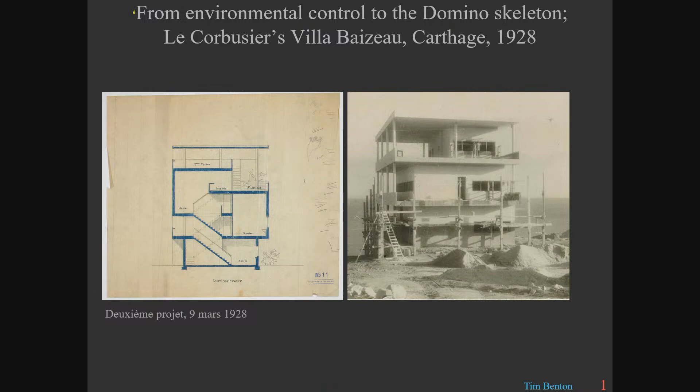Tropical climates or hot climates in ventilation and protection against the sun. So there are 2 sets of completely different ideas in this project, which are incorporated in 2 projects, as we'll see.

Is this working? Is this working? Come closer this one. Closer? Yeah. Ah, okay. I have a feeble voice. Is that better? Okay. Fine. Well, I'm not going to repeat what I've just said.

So I'm interested in it from these 2 points of view, and I'm going to try to interest you in it as well. So this is Sidi Bou Said in a suburb of Tunis, in Carthage, which is a kind of promontory that sticks out beyond the city of Tunis into the sea. It's a beautiful residential area which was developed in the late 19th century. Has wealthy villas in it, very beautiful. It's now a kind of tourist center.

And from there, you can look back to the area of Sainte-Monique, which is a suburb, and there is the Villa Baizeau. And on the left of it is something that didn't exist when the building was designed, which is the presidential palace, which was built on land recovered from the sea. So at the time, the house was on a little cliff that went down to the sea with a beautiful view from the sea.

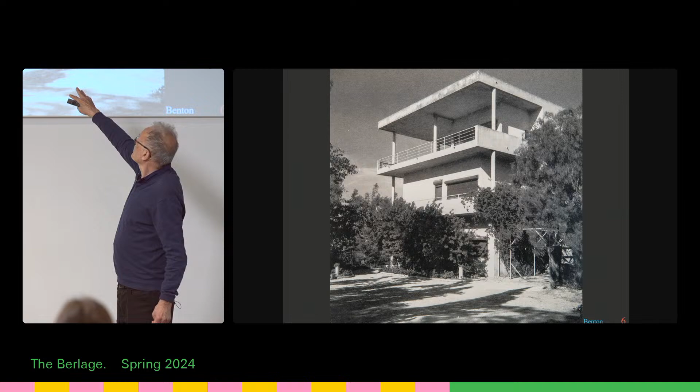This is the back of the house. I'll show you the orientation, but this is the northwest side of the house. And you can't see it, but there's a garage here, an external garage, which was originally built into the house, but was then extruded in a fairly late stage of the design, as we will see. And this is the view looking back towards Sidi Bou Said. So this is the reverse angle from the picture that I showed you from Sidi Bou Said looking this way. So it's a beautiful site, and wonderful Tunisian climate, of course, and this is the context for the project.

This is the exhibition and conference and events that went with this catalogue. And it's interesting because Roberto Gargiani, who is the commissaire of the exhibition and the catalogue, though he didn't actually organize it, it was Chacha, what was her name? I'm sorry, I can't remember her name. But she was the architect who physically organized the exhibition. But their slogan for the house is that it's a simple house.

In the Tunisian context now, there's a movement to try to revive interest in the values of modern architecture and to strip it away from the colonial aura, if you like. And so there's a big campaign behind all this to try to get the house opened up, to get the Secret Service out, to make it visitable, to make it a tourist attraction. There's a whole politics behind that. And so this presentation of the house as simple, undecorated architecture is part of the rhetoric of the exhibition.

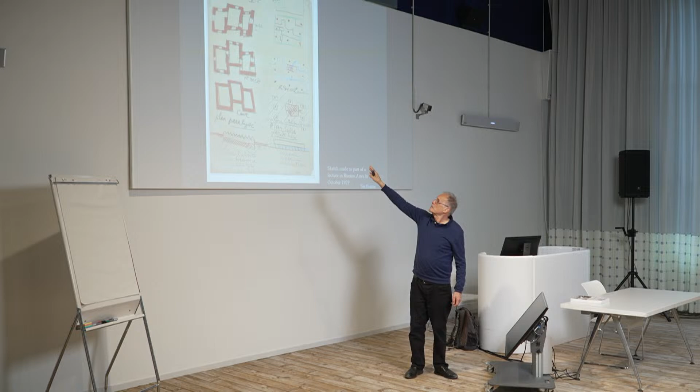So this is an exhibition, in a conference, a lecture in 1929 in Buenos Aires. This is the drawing that he did. He used to do these drawings himself while he was talking. And this explains his principles. There's the paralysed plan of walls made of solid material. Every floor dictates the floor above, and so forth.

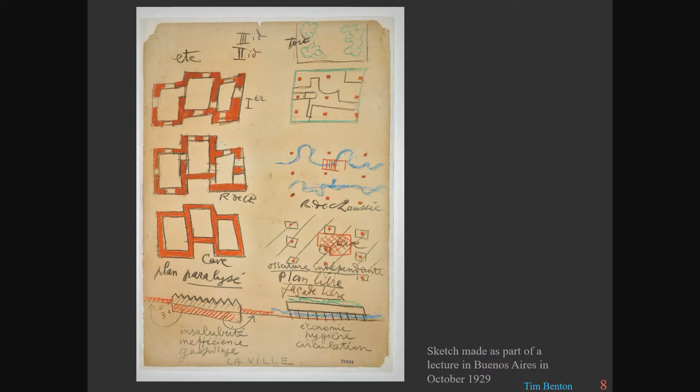And this is the revolution of modern architecture, where the little pilotis, the little red points, are completely separate from the organization of the spaces. This is the separation of structure from enclosure. Okay. And this is one of the fundamental ideas of modernism, that is the movement in architecture between 1920 and 1929. Okay.

So you find it in the Maison Cook, 1926. There's your pilotis. The pilotis are set back from the wall, so the windows are a curtain wall. The windows are supported from the floor slabs, and the column, you can see, goes all the way up through the building. There's the Villa Stein de Monzie, where it's not so easy to see, but this is also a curtain wall. The pilotis are set back, and the windows are strip windows, which are supported from the slabs.

And the end of this sequence, oh, what's that? Water. Oh, thank you.

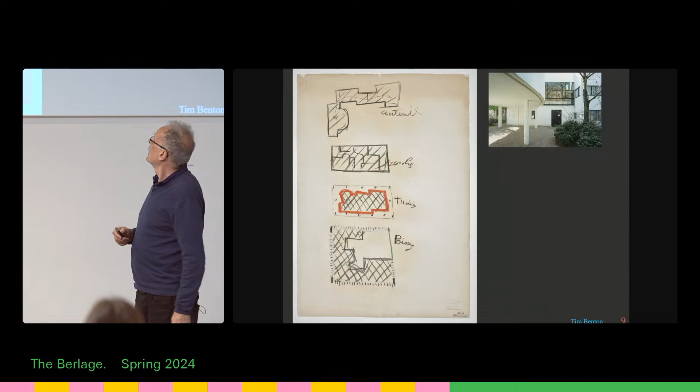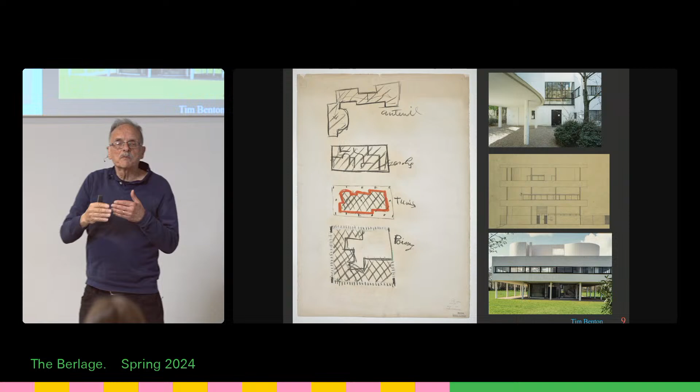The Villa Savoye in 1929. And in another drawing in his lecture in Buenos Aires in 1929, he shows this development from Auteuil, which is the Maison La Roche, there, to Garches, which is the Villa Stein, to Baizeau, Tunis, which is the elevation drawing, to Poissy. So it's part of a sequence of thought.

And one of the things with all Le Corbusier's buildings is, architects like to say, I had a program from the client, and I carried out the program. Corbusier didn't think like that. He had a client who'd pay him some money, and had to listen a bit to what the clients wanted. But for him, a building was the next stage in the development of his architecture. Okay? So let's not fuss about arguing whether it's a good thing or a bad thing. That's how he worked. Okay.

So the origin of the story that I'm going to tell you is in Stuttgart, at the Weissenhof-Siedlung in 1927, where Le Corbusier built two houses. He built a basic little house called the Citrohan house type, and he built this, which is basically a slice of an apartment block. Okay, you have to read it as a floor and a half of an apartment block. And it's built on not pilotis, but steel stanchions, which rise up through the building, which create a curtain wall inside the structure of the building.

And the interior is completely openable, has a different configuration for day and night, and was an astonishing thing. So the beds slide out at night, and at night, the whole wall there slides across right through to the other side, and there's a door in the sliding panel as well. Okay. So this was a dramatic thing.

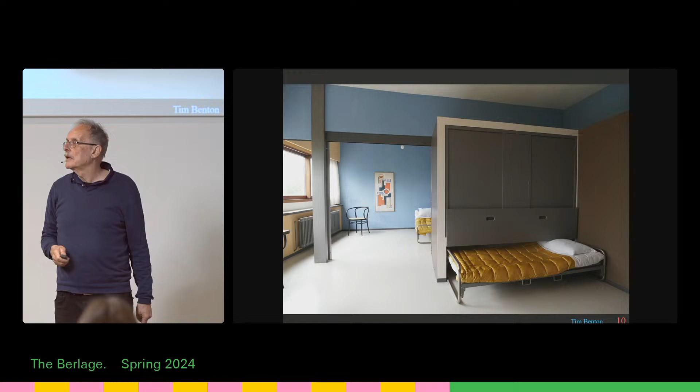And Lucien Baizeau wrote to the people at Stuttgart, to Werner Graeff, who wrote one of the books about the estate, and said he'd like to know more about Le Corbusier's work. And Werner Graeff sent him to Le Corbusier's atelier in Paris, and in November of 1927, one of Baizeau's associates, somebody called Bourguiard, went to the Rue de Sèvres, the atelier, and met Pierre Jeanneret, Le Corbusier's associate, and they talked.

And now I'm going to have to follow a little bit my notes in order not to make a mistake. So what happened was that on the 10th of November 1927, I made a mistake in my own notes, Lucien Baizeau, it was actually him, who visited the atelier. And on the 24th of November, his secretary proposed a new visit by Monsieur Baizeau. And he says, this visit will allow us to complete the documentation which you so kindly provided for Mr. Baizeau, and he would like to submit to you at the same time a project of a personal villa that he would like to adapt to your ideas.

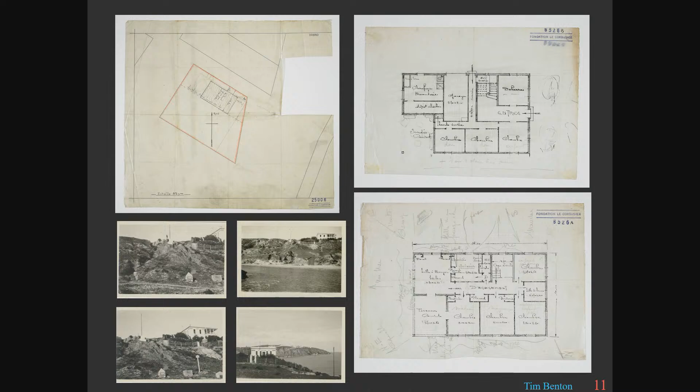Okay, this is not normally how clients talk to Le Corbusier. Normally, they said what they wanted, they might have some notes written down, and then Le Corbusier would go off and do a design. This is a client who says he has a project for a villa, and what's more, he sent him two measured plans of what he wanted. Okay? And these are actually measured plans, they're to scale.

But, I mean, there's nothing about structure, there are no elevations, they're kind of not architectural, they're organizational plans. And they sent him,

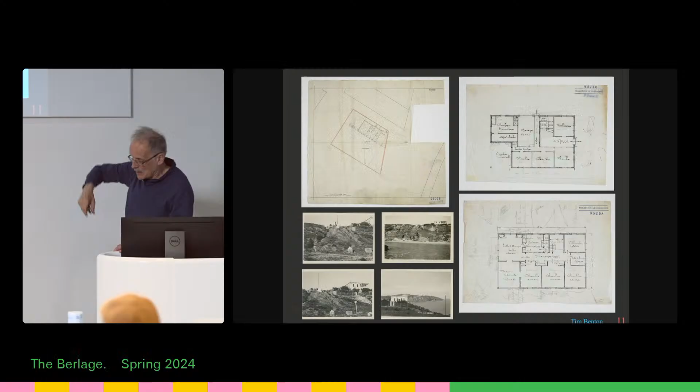Can I point with this? Does this point? No, it doesn't point.

Okay, up there is the site plan. So the sea is down here. Sidi Bou Said is over there. South is down here. So that's southeast, that's northeast, and that's northwest. That's the site. And he sent him a packet of photographs.

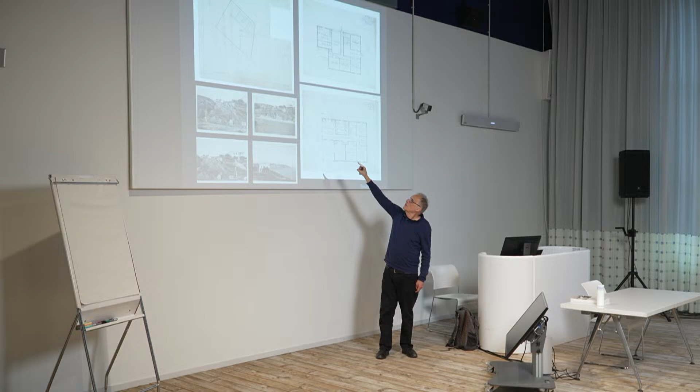12 photographs, I'm just showing you 4, showing the view from the sea here, with this rocky cliff where the house was to go on top, and also showing the house next door. The house next door is important because you'll see that it has a balcony on the north corner of the villa. And this is facing the beautiful view, but protected from the sun and protected from the hot winds, the Scirocco winds, which come from the desert from the south.

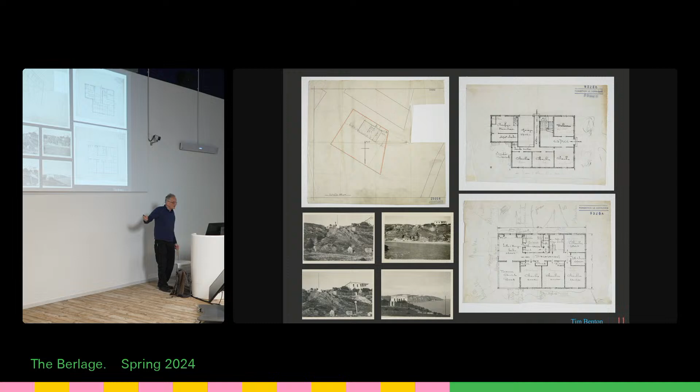And this house is mentioned several times. There you can see it again, and there again. And this is where the house was going to be, where the Villa Baizeau was built. So there's the site plan.

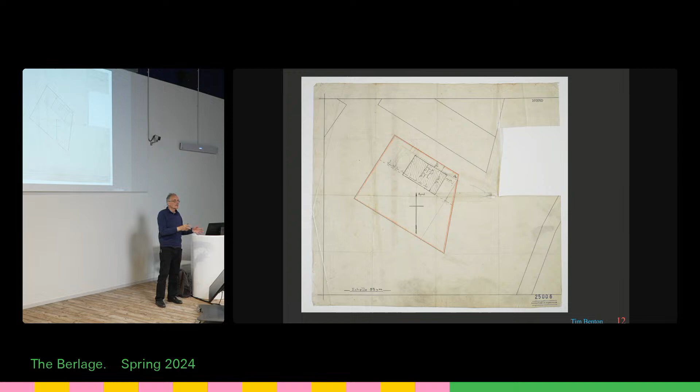Now, the bottom part of the site was non aedificandi. The military owned that whole part, and it couldn't be built on. So it's basically a 10-meter strip. It's a 12-meter side, 10-meter buildable with 2 meters facing the road on the other side, which couldn't be built on. That's the basic brief. There again, you can see it.

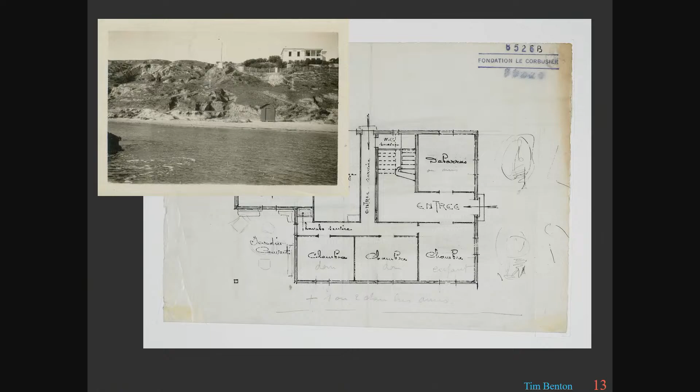And so in Baizeau's plan, on the ground floor, the covered garden is also on the north corner, protected from the hot winds and from the sun. Okay. He has a garage. In fact, you can't see it here. Can I go back? No, I can't go back. The garage is on that side, and actually would have meant driving round onto the military land, which is not explainable, really. The entrance was from this northwest corner, and there were basically bedrooms on the ground floor.

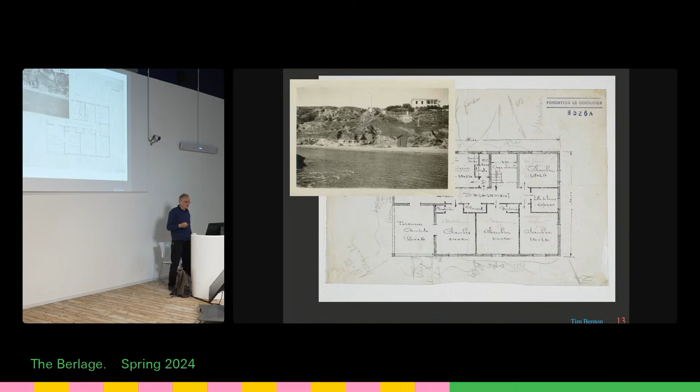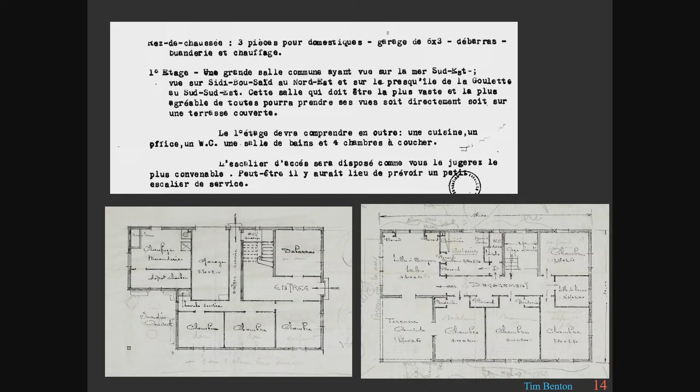He notes that perhaps there would be a space for a second staircase, a service staircase, as well as a main staircase. And he says the client insists that ventilation should be as good as possible in the house. Okay. So Le Corbusier seized on those two sentences, and those became the theme of the first project. So I'm not going to go into detail about all the aspects of the plan. It's going to take too long. And this is what he comes up with.

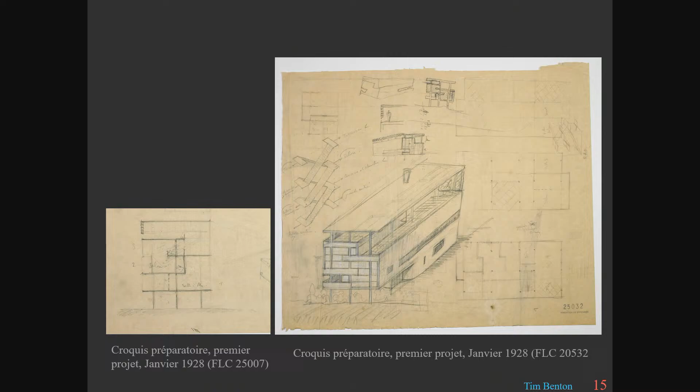The basic idea is a section where the house is raised off the ground, typical Corbusier idea, and that there is then a flow of air from the bottom all the way up through the house to a roof slab, which is protected by a parasol roof. Okay. Nobody had done anything like that before. This is a complete invention. It came from Le Corbusier reading this thing about ventilation. Okay, so the project is about ventilation. But he also listened to this thing about perhaps you have a service staircase.

Well, he just designed the project that nearly won the competition for the Palace of the League of Nations, where you had an incredibly complicated staircase with staircases inside each other, so that different types of people would be delivered to different floors. Actually, this is a kind of classic Beaux-Arts project.

If you go to the Bourse in Paris, the Halle aux Blés, the Bourse des Blés in Paris, which is done by an academic architect, there's a beautiful staircase there which has a double staircase. If you go up one way, you stop on one floor. If you go up the other way, you stop on the next floor. So this was a kind of classic architectural problem.

But you see Pierre Jeanneret, this drawing is by Pierre Jeanneret, sketches this out. It immediately creates all sorts of problems because, can you see?

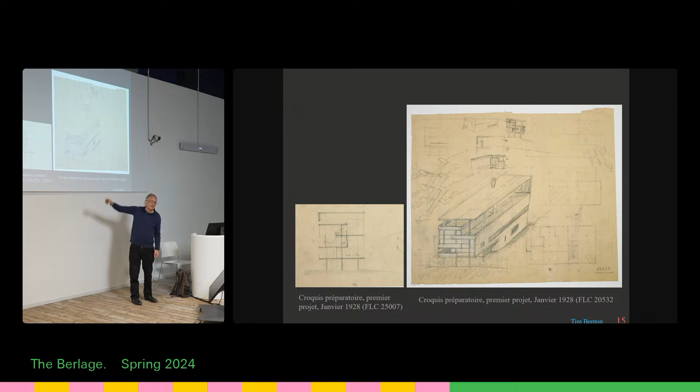Yeah, all this bright light, which I suppose is meant to illuminate my face, makes it difficult to read the drawings, but there you are.

So it creates problems because on each landing, the domestic people arrive on one side and the noble people arrive on the other side. So it creates all sorts of problems, and then on the floor above it changes round. And so it's not a very simple problem that he introduced.

The ground floor, he follows Baizeau's idea of having the garage on that side. On that, he's following Baizeau. So you drive across the military land, and nobody knows how that worked. But the idea was you hollow out the front of the building. So the pilotis are here, and that gives the impression, when you look from the sea, which is the dominant view for him, it's a view that nobody sees, but that's a dominant view for him in the design, the house is lifted off the ground.

Actually, although the pilotis are set back from the sides, you don't see it because the walls are solid except for the windows. Okay. And this is the non-aedificandi band here. So the idea was the cars would drive around like that.

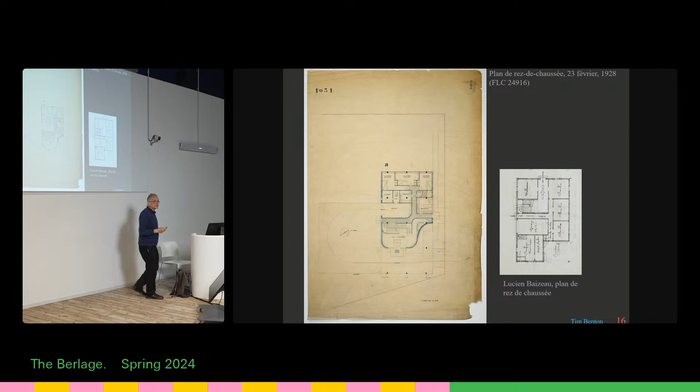This is the first floor, and you can see the problem with the staircase coming up. So the servants go out that way first, and then the noble people come up from the other side and have to go round the staircase to get to the dining room. But look at this. He's put the terrace on the southeast corner, which is where all the hot winds come from. Nobody knows why he did this, but it was not going to be a good idea from the start, and Baizeau was going to reject it.

And then you can see the effect of this section, that on this floor, all this side are empty spaces. They're the top of double height spaces where the air goes up. And then it's picked up, there's a balcony on this side. So the air from the dining room is here. That's the top of the dining room. It's picked up by the balcony into the salon. And the salon then has a balcony over it, which leads up onto the terrace.

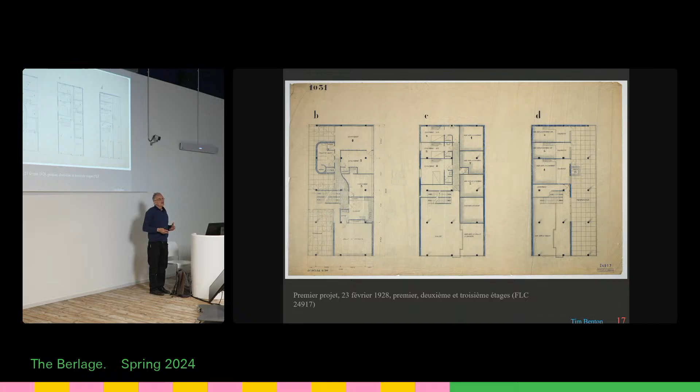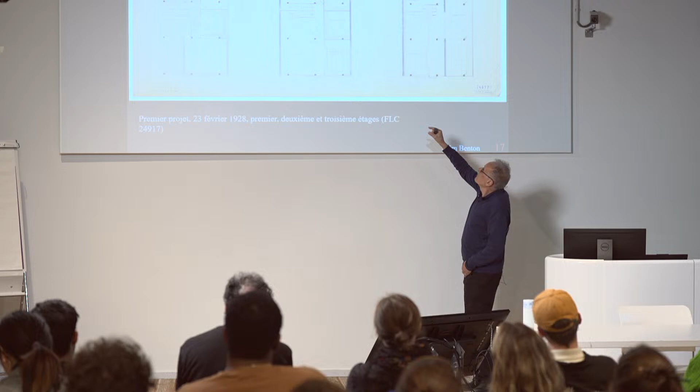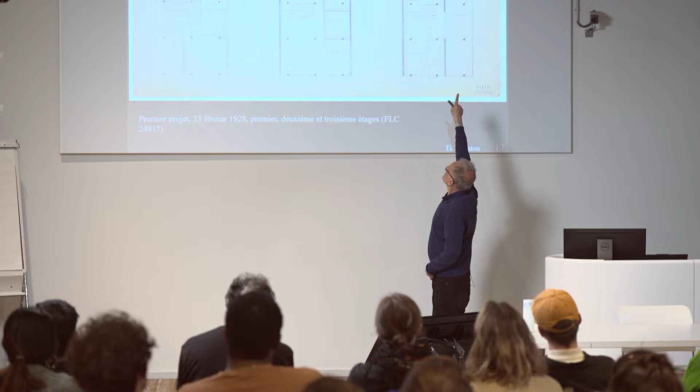Okay. Now, Baizeau specifically said he only wanted one living dining room. And Le Corbusier has made three reception areas. So this is quite typical of how Corbusier worked, in not following what the clients wanted. And then for the bedrooms, it's a similar thing, that each bedroom has a balcony where the bed is, where you go up a staircase and you go out onto the terrace. Okay, and this gives you these elevations.

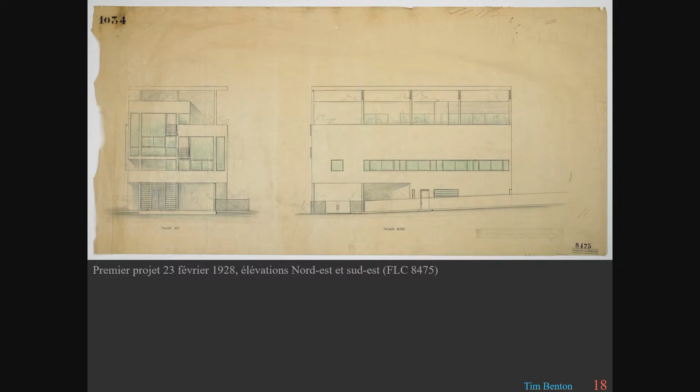One of the problems which dogged all these first projects is that Baizeau told him you can't go out to the edge of the site because the land drops away. But Le Corbusier went out to the edge of the site because he wanted the maximum view from the sea. So he has a gentle slope going down on the side. And the reality was that the slope was much steeper. So there was no question of driving a car around here.

Now, you can say that in one sense he wasn't to blame because the plan that Baizeau sent him wasn't very specific on the contours. But if he'd looked carefully at the photographs, he'd have realized that. So this was another thing that from the start wasn't going to work. And in the end, they had to build a whole abutment. This is where the cliff drops away, and there's this huge abutment that they had to build in concrete to support the end of the house. This is at the end of the whole process here.

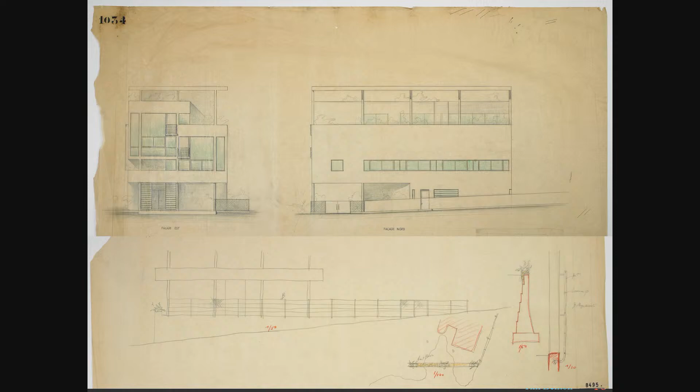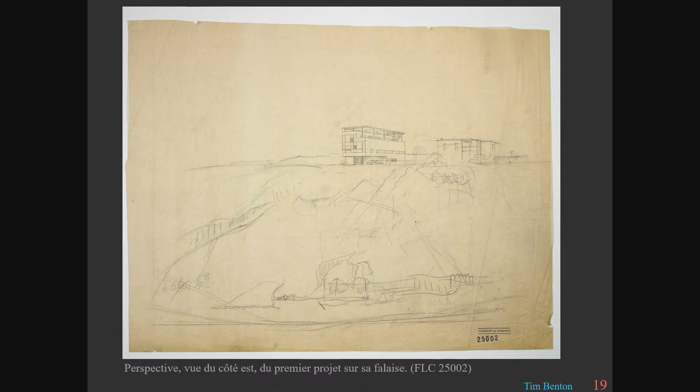Okay. And so that's what he wanted. That was the view he wanted from the sea, the view that he saw from the photograph. That was the effect that he wanted to make. Sorry? The other house, that's the existing villa which he's kind of sketched in. This was not published in the Oeuvre complète like this. No? Only this, so he erased the house. I'd forgotten that. In fact, you can see that. Yeah.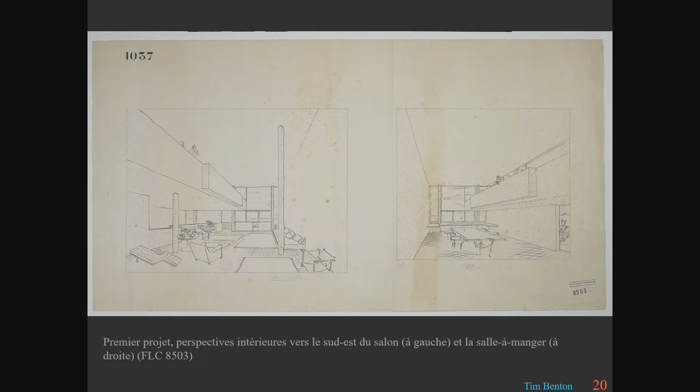Okay. And these are the interiors which show the effect of the space flowing up through. And they're actually interesting for students of Le Corbusier's furniture, because we were talking about the furniture today. This is a colonial chair. I told you about these wooden chairs with leather straps. That's one there that he's showing here.

And those are the leather chairs like he used in all his houses, Maple's leather chairs. And then these are bentwood, the B5 Thonet bentwood chairs. So it's already interesting that he's putting furniture into this house. This is just after Charlotte Perriand joined the atelier.

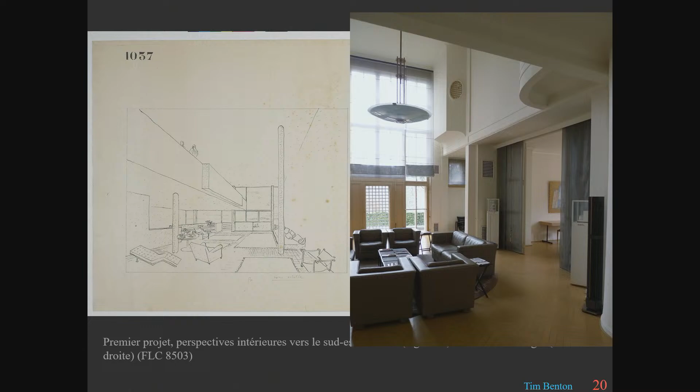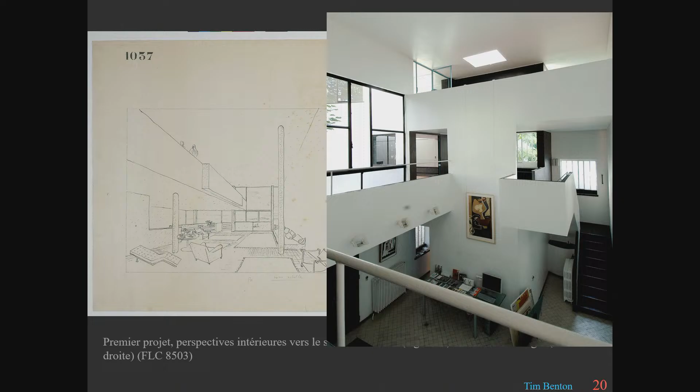I don't know why I'm showing that Schwob. Okay, right. Yeah, I see. I remember now. This is the Villa Schwob, 1917, which already had a double height space with balconies going around it. So from an early stage, he was interested in double height spaces. And we've been looking at the Maison La Roche, which also has this triple height space in it. So this was a theme of Le Corbusier, to try and break through floors and get height.

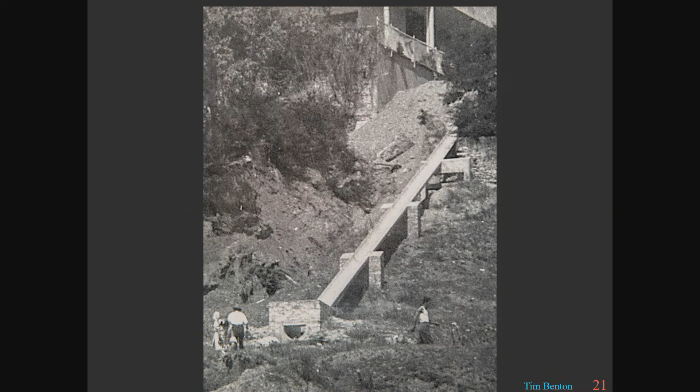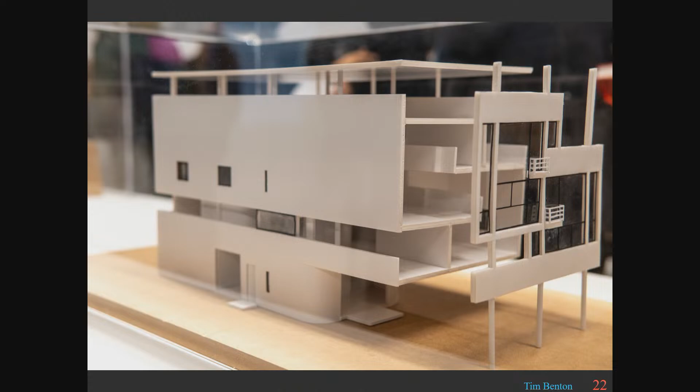You've seen that? Okay. I'm going to go quickly through that. So you can see up there, this is a photograph of this sewer. Up there, you can see the abutment that supports the house now. And I've done a detail of it. There you go. It's not my fault the photograph's like that. This is an old photograph. And this is the model they made for the exhibition, that model where they lift the facade away, and you can see the flow of space in the house.

Okay, then, very unusually, Le Corbusier did that first project very quickly. It was already finished by the 25th of January. So it was done in about 3 weeks. For Le Corbusier, that's lightning fast. And clearly, Baizeau saw the plans. We don't have documentation about what he did, but immediately afterwards, Le Corbusier did another project, which is exactly the same as the first project, but just smaller.

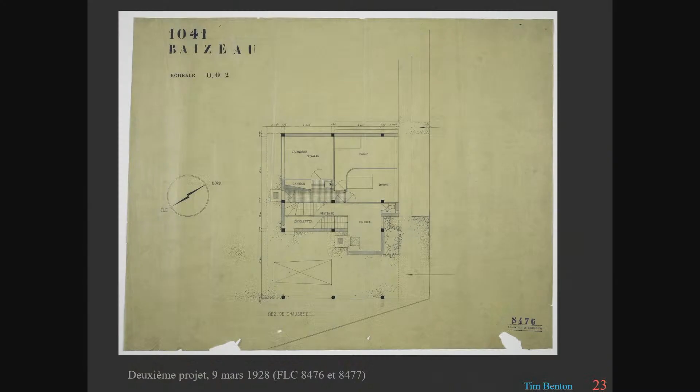All Le Corbusier's projects are too big to start with. He never listens to what the clients say about cost or scale or anything. So the client said, oh, that's much too expensive. So his solution was simply to chop off the end. So there's now no garage. The cars just stop underneath the house, and everything is reduced to the point where many of the things that Baizeau had specified, like the number of bedrooms, because there were 2 maids' bedrooms, there were 3 children's rooms, there was the master bedroom, and so forth. This project doesn't have them, because it's just made smaller.

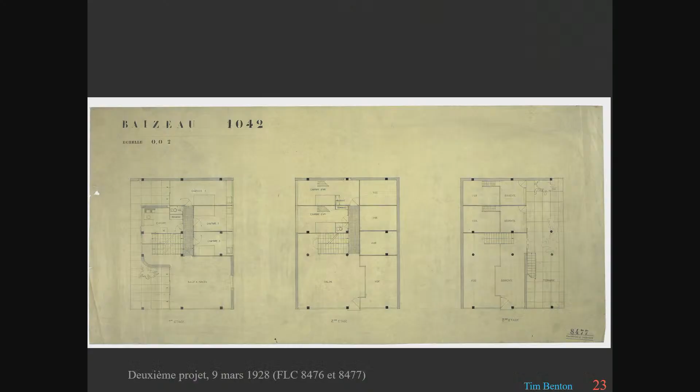So you can see he's still got the double staircase, but now he's reversed it. So the noble side of the staircase comes out next to the dining room, but everything else is the same, or nearly the same. I'm not going to go into the differences. Now, one of the interesting things in Le Corbusier's work, and I think in most architects' work, is intertextuality. When an architect is working on different things at the same time, there's a slippage. Ideas move from one project to another.

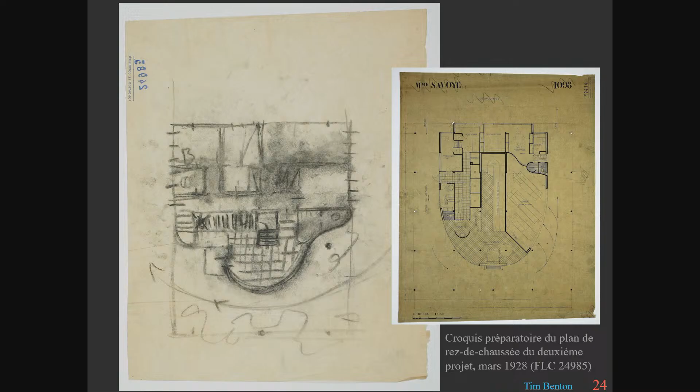Okay? So this is a charcoal design by Le Corbusier, early design for the second project for the Villa Baizeau. And it's very like the Villa Savoye, which was designed 6 months later. And this connection is kind of spooky, because in the elevation drawings for this house, you have little sketches which are really like the Villa Savoye. You see the one up there? Or this one here? So to the point where you can ask, is this Le Corbusier sketching on this drawing when he was working on the Villa Savoye?

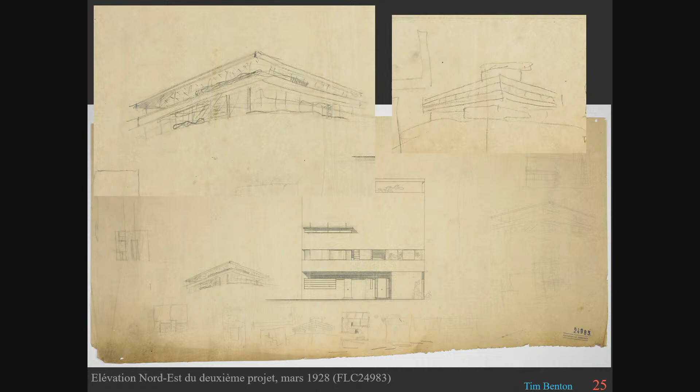Or is this Le Corbusier saying, well, actually, now we've got a nearly square house on an open site, what could we do with it? Why don't we have the pilotis going all around? And he started thinking in the same way that he thought about for the Villa Savoye. Okay, so the second project didn't correspond in any way to what Baizeau wanted. And on the 2nd of May, Baizeau wrote a letter formally rejecting the second project, very explicit.

And he says, for example, on this terrace, we put the kitchen projecting to protect the open terrace from the sun. Okay? Protection against the scirocco. That's the wind from the southwest, which, without this screen of the kitchen, would make, on certain days, that terrace uninhabitable. So he's quite specifically saying what is obvious if you look at the house next door, what you have to do.

And then he says, and this is Baizeau being extremely diplomatic, because in the first part of the letter, he repeated almost word for word what he said in the first brief. And he says, it's inspired by these different considerations that we have completely modified the project. So again, he's not going to be browbeaten. Le Corbusier has done this project, he doesn't want it. So he rejects it formally in a typed letter, and he provides 3 floor plans. Okay. And you provide? 3 floor plans.

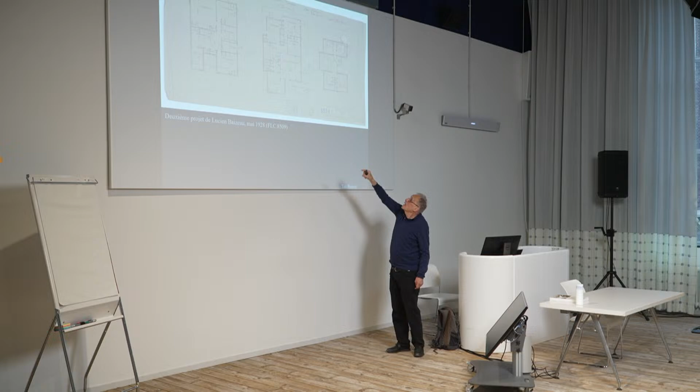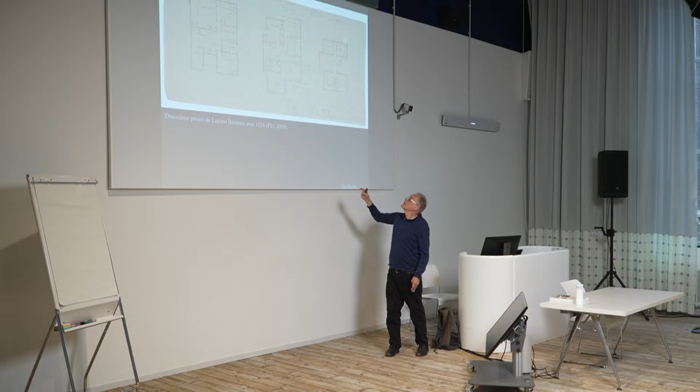You can see up there a conventional staircase which rises up. Actually, he has it going round like that, but that's how he has it. He has a single living room, which is a living dining room, a salle commune, and a kitchen. Okay, and then the rest is all bedrooms. And I think Mrs. Baizeau, who actually we know played an important part in these discussions, made sure that each room had lots of cupboards.

Okay. So this is really a client's drawing. But the most important aspect of this is that Baizeau and his wife clearly thought about the problem of protection from the sun that Le Corbusier was thinking about. And their solution was to have a base larger than the house. They don't show anything about structure in this, but that would be reflected on each floor in terraces that go all the way around. Okay?

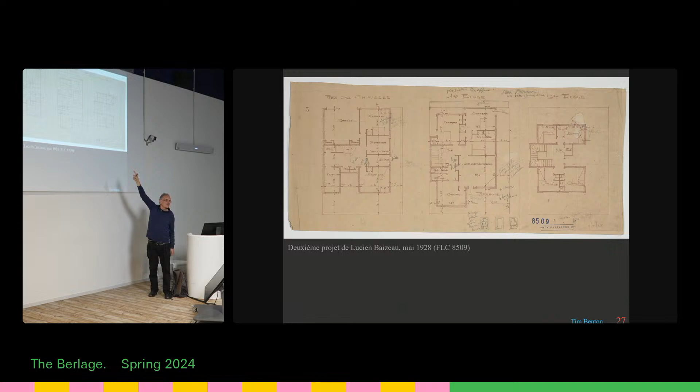So there are no pilotis in this, but the implication is that on each floor there would be balconies that would project. Actually, on 2 sides, because on the other side, it's Le Corbusier himself who adds a balcony. So this is protection from the sun by balconies. The balcony provides a kind of brise-soleil. And this plan, provided by Baizeau and his engineers, is commented on, and Le Corbusier at the bottom makes some scribbled notes, in which he interprets Baizeau's plan in his architectural way.

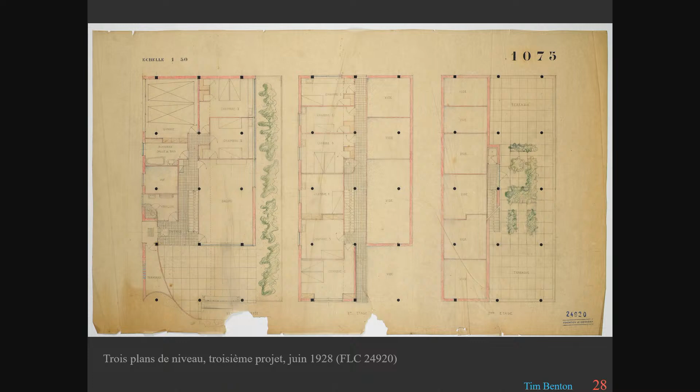Okay. And this is almost exactly what he then draws in his lecture in Buenos Aires, the free plan inside a structure. He still isn't showing the pilotis, but for him it's obvious that the slabs would be supported by pilotis and that these would be separate from the enclosures of the rooms. So then they've had this absolutely stern reprimand, your project has been rejected, and they do a 3rd project. And that 3rd project doesn't follow Baizeau's plan or follow the little sketch that Le Corbusier did. So it's even a question of when that little sketch was done. Was it done afterwards or before?

So what they do, basically, in order to get the protection of the terrace on the first floor, in fact, they have a bedroom there, is to chop off 1 floor. They just chop off 1 floor. So now the salon is on the ground floor. There's a concrete screen, which in some versions has a glass screen protecting the terrace, but it's still the ventilation section.

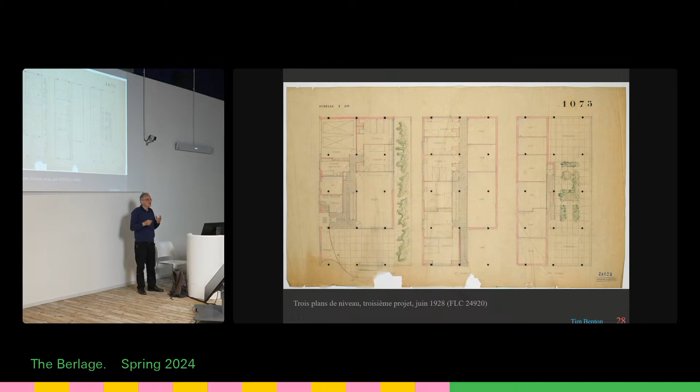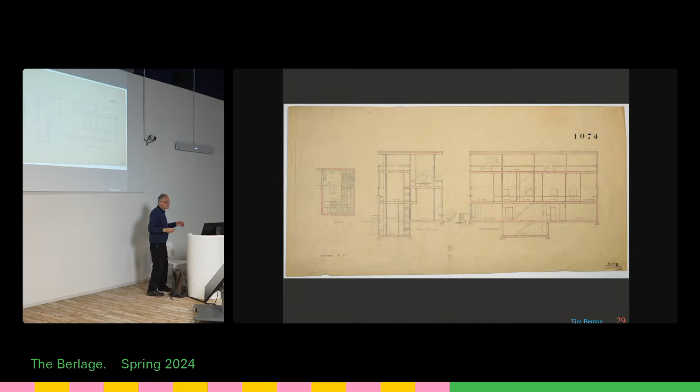And so then, in July, finally this project was sent off, and Baizeau writes, and he says, "I've just received your plans. I'm very sad to see that you've taken very little account of the very precise indications that I gave you in the month of May. I must ask you now to study these carefully, immediately, and to conform as exactly as you can to what is required. These conditions correspond strictly to my needs, and I hold absolutely that they should be respected." And then he says, I'm going to come to Paris soon, and he hopes to have an immediate response.

Well, July 1928 was a very busy time for Le Corbusier. He was designing the Centrosoyuz headquarters in Russia. He was designing the Villa Savoye. He had a number of other projects, including the Maison Loucheur. He was doing the finishing touches to the Villa Stein, and it wasn't a very good time to do a complete redesign. But Pierre Jeanneret did a version in which he goes back almost, this ground plan is almost copied directly from Baizeau.

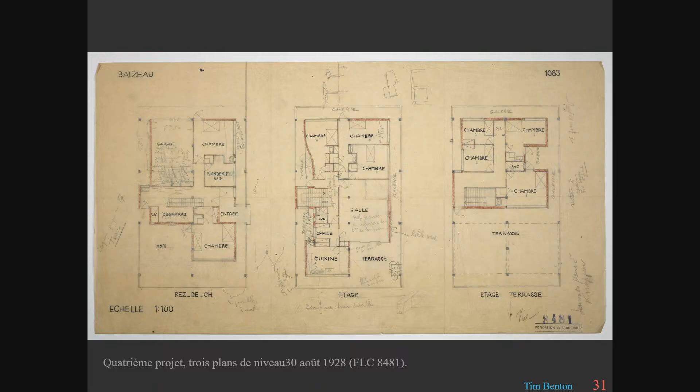There's, except that he's got the bedroom and the shelter on the wrong side, but other than that, he's got the staircase, the garage, the bedrooms, and the key thing is on the first floor, the terrace is protected by the kitchen, and there's this combined living room.

And here, they've put in the Corbusian structure. So there are the pilotis that support the terraces, and they're cantilevered on the front. So again, the privileged view, the view that nobody has, the view from the sea, has this beautiful projection of the terraces supported by the columns inside.

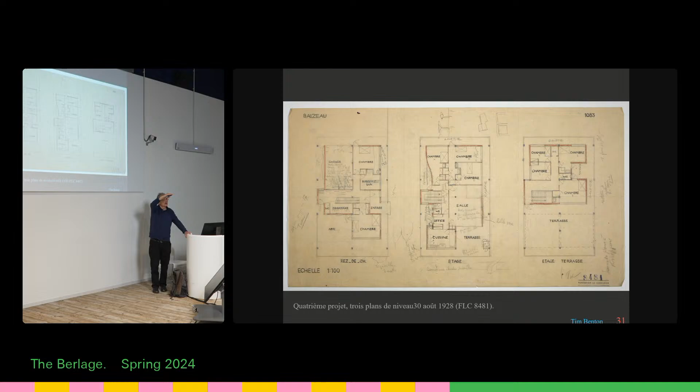And on the top floor, although the separate parasol roof, the parasol roof that has nothing except air underneath it, has gone, he keeps part of it by having most of it just a terrace looking out over the sea. So he's kept a little bit of that. And in this project, he has plans. Now, I say Le Corbusier, but this is entirely Pierre Jeanneret who's done this. Le Corbusier was too busy to look at it at this point.

So you can see the comparison between Baizeau's plan and Pierre Jeanneret's fourth project. There's one thing that's amazing because of the weight that the columns on the sides are at a shorter distance than in the center. Yeah. So this whole idea of a neutral grid also. There's 6 meters in that way and 5 meters in that way. Yes, it's very interesting.

It's because it's 12 meters long. But the load in the middle is heavier than on the side. Sorry? So you can use less columns. Right. I think this is the influence of Baizeau, okay. Yeah. That's interesting. Of course, you're pointing something out I hadn't realized, but yes.

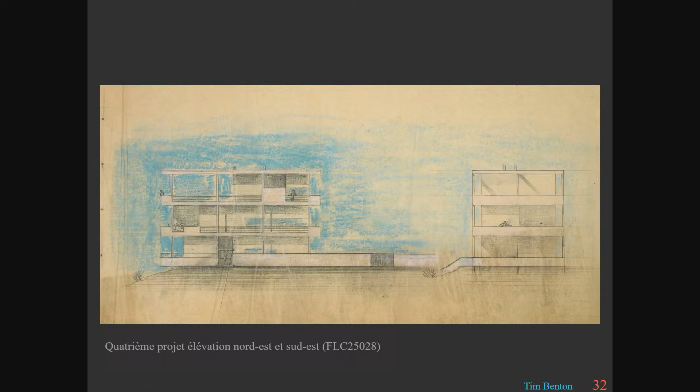And this is what it looks like. This is the perspective they did. When they do a project and they're presenting it to the client, Pierre Jeanneret always does perspectives like this with color, chalk, and so forth to make it look nice, and little people and everything. And so here we have the beginning of this idea of the domino house, the separation of structure from enclosure in which the inside is a free plan.

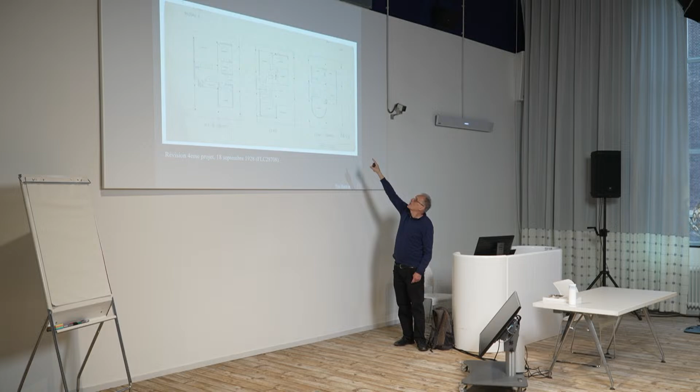Then they do a revision of that, which is basically kind of tidying it up. It's not hugely different, but it has the interesting feature of a round bedroom on the top floor facing the beautiful view. But here the columns are all the same. I don't understand it. Sorry? The column distances are the same. Yeah, yeah.

Dimensions are very interesting for Corbusier because in all his projects, where he could, he used 5 meters. Always started off with 5 meters. And then he has to adapt, according to different things. And I don't know why in the other project they were different. I'm not sure.

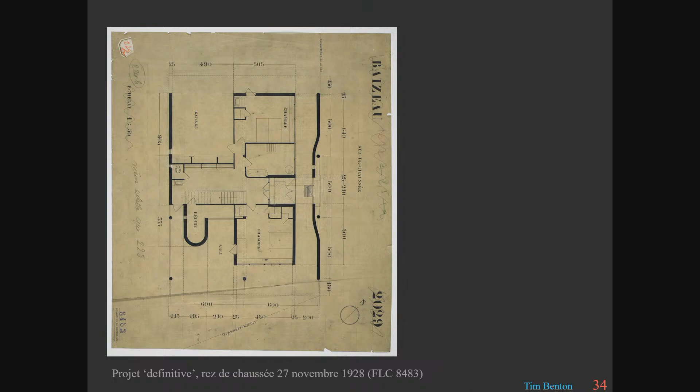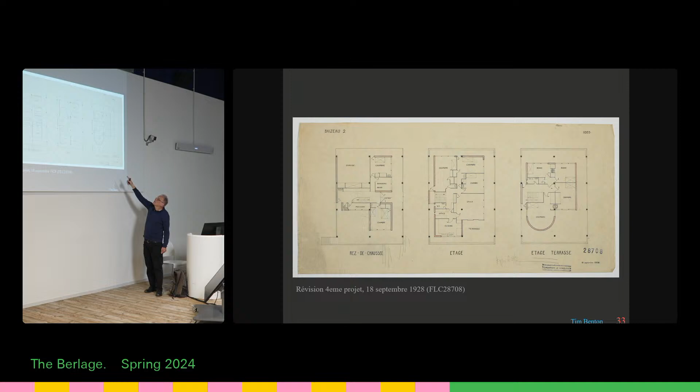And then this project gets worked up. And this is an interesting one because, as you saw here, the pilotis are in line with the edge, and therefore they're square because they're like parts of a wall. But here he has a wall because he's realized that there's actually protection there. This corner here is 2.5 meters above the ground. So the edge of the slab is already a terrace, a balcony. And he's beginning to realize that.

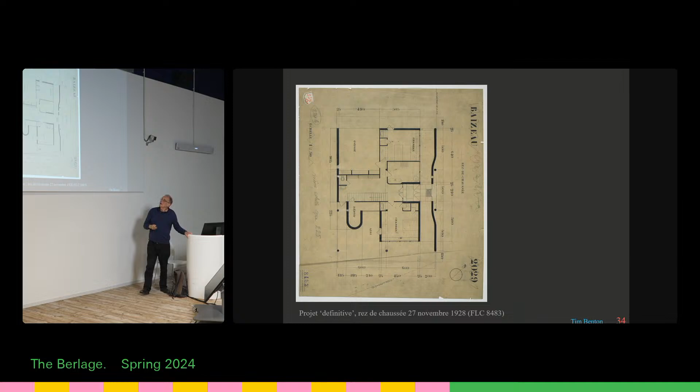So in this design, in order to make the pilotis visible, he sets back the walls to make the elevation change. And again, always with Le Corbusier, he tries to introduce curves. You can say this is because of his paintings. You can say this is a kind of anthropomorphic thing, trying to introduce bodies into his buildings. But also it's to show the freedom of the plan. How can a plan be free if it's always straight lines? Okay.

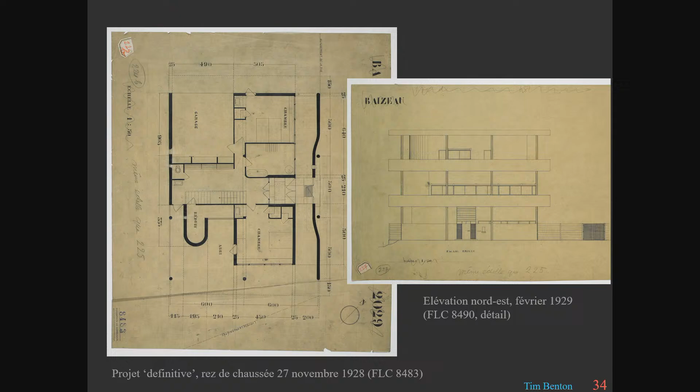So the basic thing is here you have the entrance. You go into a hallway, and there's the staircase. The garage is at the side still. That garage is then going to be extruded. And this is the effect that you get. So the domino effect of pilotis separate from the structure is made visible because the wall is bent back to expose them.

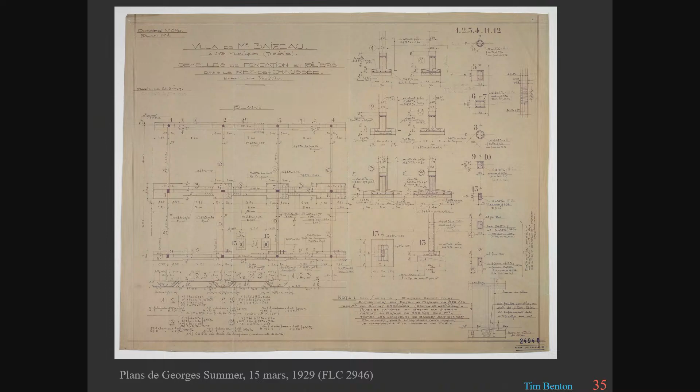So this is Summer, his favorite mason, Georges Summer, who did a complete set of structural drawings, which were rejected. Rejected by Lucien Baizeau because he had his own construction company. Why should he pay this French builder to build his house when he could build them himself? And the reason he gave was that Summer had a patented floor system, which he called the PIMA. Never understood what it stands for.

But anyway, PIMA floor system, which is basically a grid of beams with ceramic pots inside, and reinforced with iron rods. And Summer was saying, no, this is a patented system, you have to pay for it. So Baizeau wouldn't do that, so the house was built in Tunis by a Tunisian company, and for that reason we have no building records. There's no information about how much it cost, or any problems they had, leakages, all the usual things that you have information about for Le Corbusier buildings.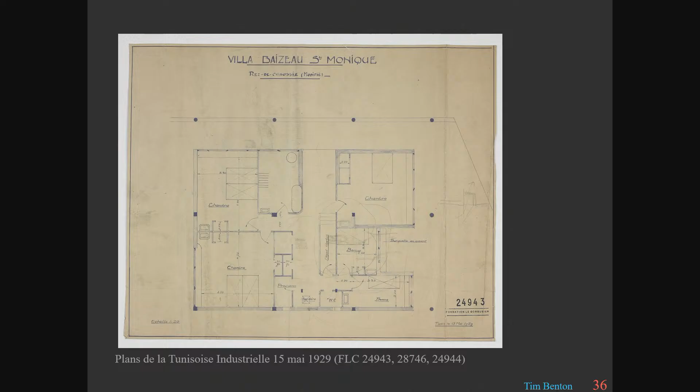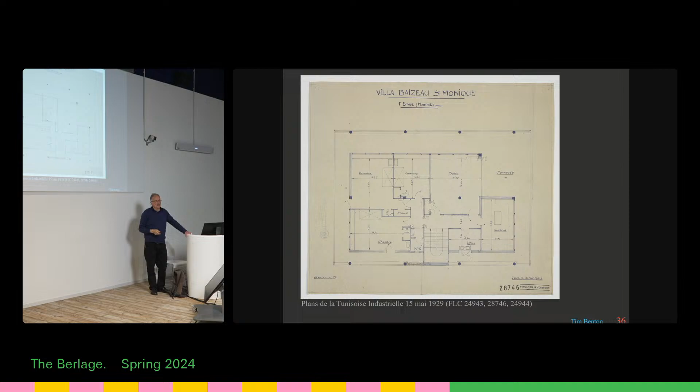So these two plans are plans by the Tunisoise Industrielle, by Baizeau's company, preparing to build the thing. So it's all carefully dimensioned, and there are sets of these drawings that have the central heating and glazing and all the details of construction on them.

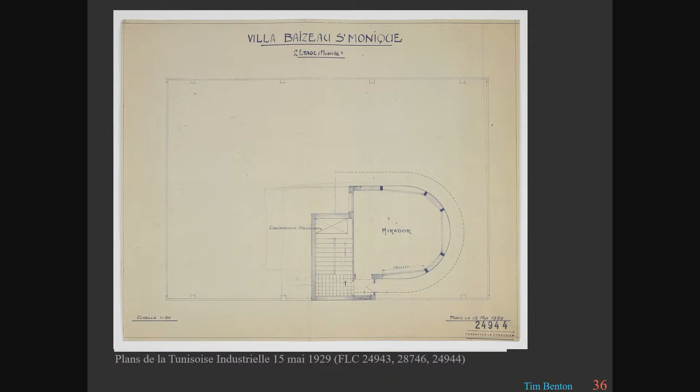And they had this idea of stripping out everything on the top floor except for what they call a mirador. So keeping Le Corbusier's beautiful curved room, which he thought would be a bedroom, but simplifying it to make it easier to build, he finished it up like that. But in the end, they add 2 bedrooms at the side. So there are the 2 bedrooms added. There's the mirador. And this again is a Tunisoise Industrielle design with Pierre Jeanneret's annotations on it.

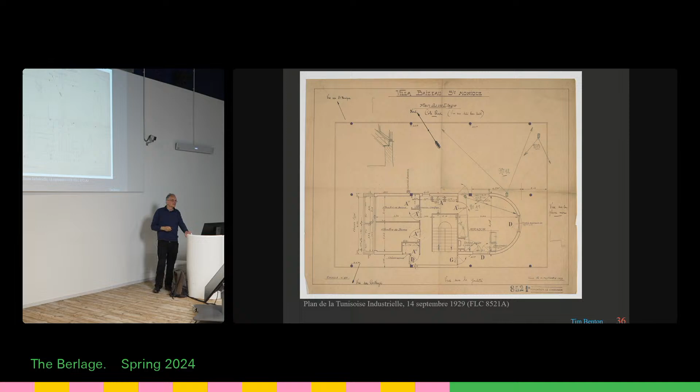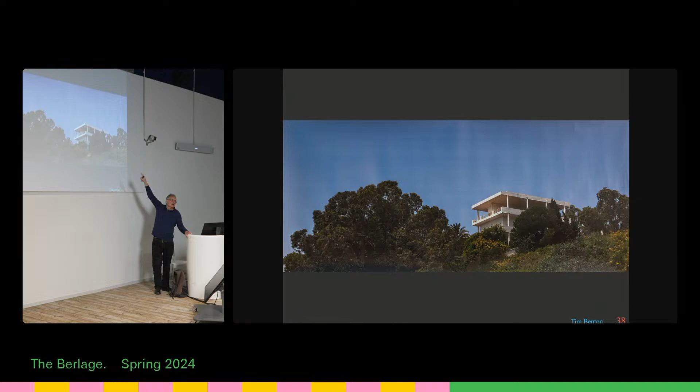So Le Corbusier never visited the site, nor Pierre Jeanneret, just as he never visited the site at Stuttgart for the Weissenhof Siedlung building. And the great advantage of that is that Corbusier insisted on controlling the colors, the polychromy in the house. And when he didn't visit the site and didn't talk to the painter directly, he sent samples and he sent instructions. And so this is a piece of paper with actual commercial color samples put on it and numbered, from blue to light gray to burnt umber to pink to green and to dark gray.

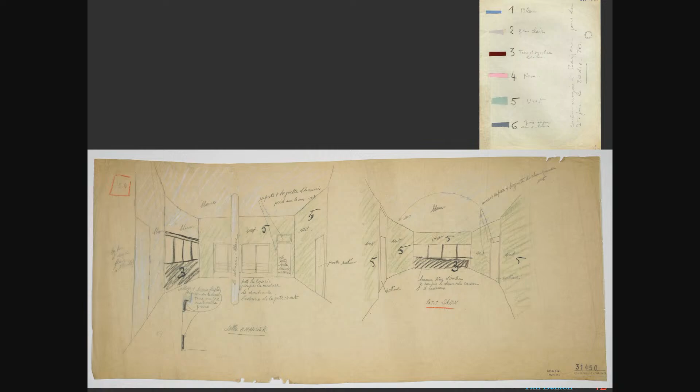So this is the main salle commune with the freestanding pilotis in it. And he's got this, I can't remember what 3 is. 3 is burnt umber. So underneath the window is burnt umber and white above. I don't think there's anything in his theory that supports that. I think he's just making the part underneath the window kind of disappear a bit to enhance the view. But why the bit above it is white, I cannot say. The rest is all green.

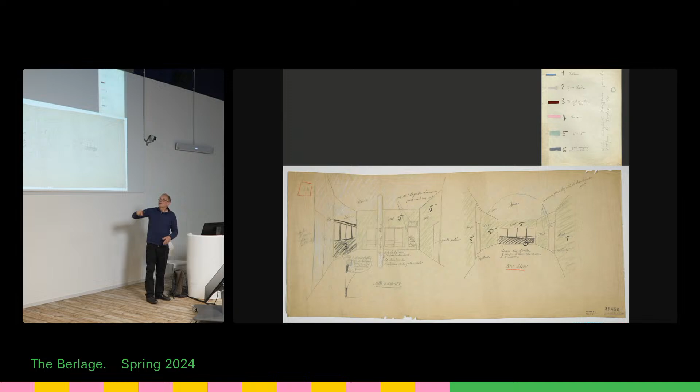In the petit salon, oh yes, the thing that happened was that the kitchen, which in Corbusier's plan had a very privileged view because it was right facing the view, becomes a petit salon. And the poor cook had to work in what was originally the office, the pantry, which is a very small space. So this room, the petit salon, in his design was all green.

But Sabine Massenet, the great niece of Lucien Baizeau, says that she remembers it as being a brilliant blue. Now, those of you who know Tunis, or any of the North African countries, or Greece for that matter, there is a kind of Mediterranean blue. There's a blue which is a common color that you see everywhere. And this is a kind of Tunisian blue that they had. And it's very beautiful, and they loved it, and so forth. So if this color scheme was adopted, they changed it to blue at some point.

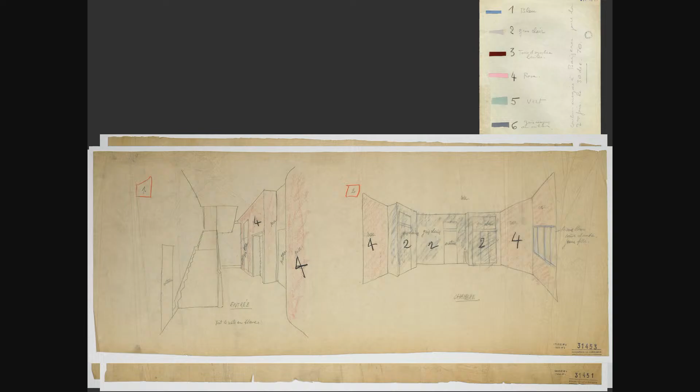This is the entrance hall when you come in, which is again pink all round. Sabine Massenet says that she was 5 when they moved to the house. And it was a very unpleasant time. Her father had just died in Algiers, and they moved and arrived in the middle of the night, and she woke up in a beautiful pink room. That's what she says.

Anyway, this is a windowless area which you come in from the entrance, and the pink is a welcoming color that welcomes you in. But I just don't think that there's a theory of polychromy behind any of this. This is a much simpler and more human way of using color, I think.

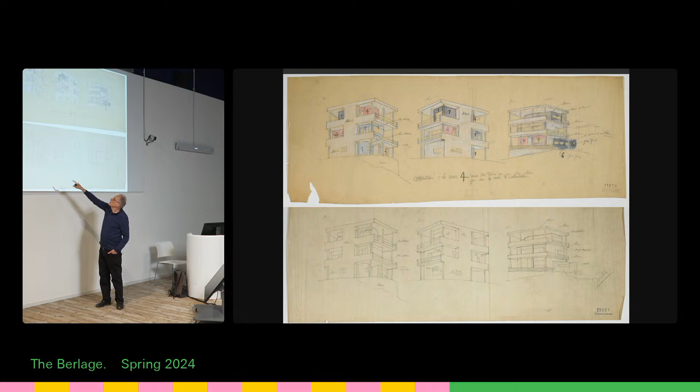Okay, so that's why I think the Villa Baizeau is worth studying. You might not agree with me, but I'm very fond of this house. I think it's full of interest, and it raises a lot of questions about how Le Corbusier worked, but also about relationship with clients, and about climate and so forth. And this thing about the parasol roof and using natural ventilation was a theme that would come back in his work.

First of all, in the steel project he did in, I think it was 1945, for an exhibition space in Paris, which was a steel roof, 2 welded steel roofs on supports with a kind of boxy interior. That project became the Zurich Pavilion that was actually built after his death.